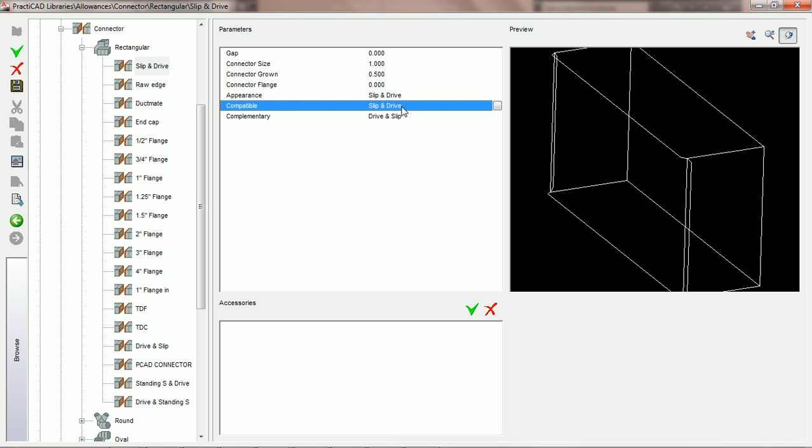You can see that we've got compatible selected as itself, which is always natural for all connections. However, we want to point out something in this particular case. When we say compatible with slip and drive, we're talking about if we attach the width of one fitting to the width of another fitting, then we should use the default compatible connector. In this particular case, it means slip and drive should be slip and drive on both sides of the connector.

However, if we were to take the second fitting we place in a drawing and rotate it at 90 degrees, now we'd actually be attaching the depth of that fitting to the width of the first fitting. In that particular case, we need the connectors on the second fitting to change. And that change is defined by whatever connector you've chosen in your complementary selection set.

So what we're going to do here is say for slip and drive, we would like to make a complementary connector of drive and slip. Now currently in this tutorial it's already set to do so, but to show you how you would get it set to what you'd like, you'd come over here to the dialog box, you'd click on it, and then you'd answer the two questions in the complementary field. The first one is what connector should be complementary with slip and drive? In this particular case, we've said drive and slip.

That means that if we were to take two pieces of duct and we were to rotate the second piece of duct at 90 degrees, that instead of using the compatible connector, it should switch and use the complementary connector. And this is going to be much more clear when we demonstrate this on the drawing shortly. So we're going to say that for slip and drive, the complementary connector will be drive and slip.

Now one thing I want to point out, each connector can only be complementary with one other connector. You cannot have slip and drive complementary with two different connector types, only one. Therefore, if you set a complementary connection for one connector, in this particular case, slip and drive is complementary with drive and slip, PractiCAD would automatically change and update the complementary connector for drive and slip to slip and drive. It just does the reverse. You don't have to change them both.

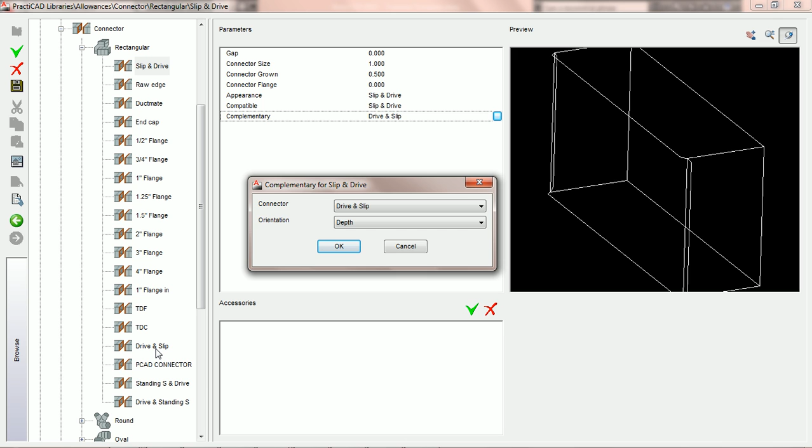You'll notice if we press OK, since we've set slip and drive to be complementary with drive and slip, if you click on drive and slip, you'll see complementary is now slip and drive. It does it automatically. You only have to change it once. So we're going to go back into slip and drive. We're going to go to complementary, go to our dialog box, and we're going to look at the next choice.

The next choice is about orientation. Two choices here, width and depth. Essentially what we're doing is we're stating that for a particular connection, we want the drive on a specific side. For example, we say that if the connector is slip and drive, the orientation of the drive should be on the depth. If we had changed it to width, it would put the drive on the width.

But for those that want to make it so that the depth of the fitting, which is usually the parameter we're looking at in front view, is always going to carry the drive, we set it here, and now we press OK. You can see if we come over to drive and slip, and we go into complementary, drive and slip's complementary with slip and drive. But for the drive and slip connection, we're stating that the orientation of the drive should always be on the width of the fitting.

And we're going to show you what classifies as width and depth of the fittings very shortly. But these parameters happen to be the most commonly used as well. So if you're trying to set your PractiCAD for slips and drives and slips, standing S's and standing drives, these are the most common choices here. Generally, the philosophy is always put the drive on the depth or always put the drive on the short side. And there's a separate tutorial on that under the advanced specification section.

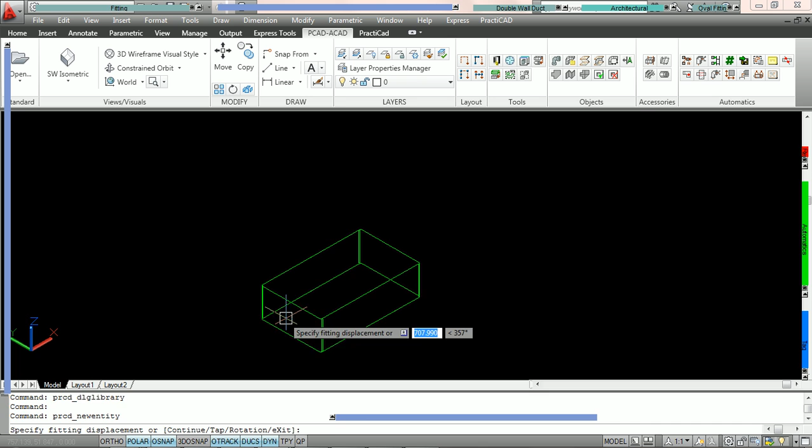We're going to go into the fitting bin and we're going to grab a rectangular piece of duct. And you can see here that we've got it set for slip and drive and slip and drive. Now what we're going to do is place this fitting on the drawing. And we're going to double click on it and open up the AutoCAD property box. You can see the connectors here.

Now what we're going to do is let go of this fitting. We're going to grab a rectangular elbow. Now we're going to hit C spacebar for continue. And let's go into the item box. Now take a look here. Currently, I haven't placed the rectangular elbow on the drawing yet. It's still waiting for me to attach it.

But in order to attach the rectangular elbow to the rectangular duct on your drawing, it currently has the connector in slip and drive. That is slip and drive's compatible connector. Slip and drive was set to be compatible with itself. That will always be the choice when we're taking the width of one fitting and attaching it to the width of another fitting. And we always read in PractiCAD the width of elbows as the cheek parameter.

So this parameter here is the width of the elbow. The throat parameter is the depth. So since we're attaching the width of the elbow to the width of the rectangular duct, and they're attached right here, we're using the compatible parameters.

However, if we switch this elbow and rotate it at 90 degrees, we're now taking the throat or the depth of the elbow and we're attaching it to the width of the rectangular duct. In this particular case, PractiCAD does not use the compatible connector for the elbow. It uses the complementary connector for the elbow. And you can see here that it says drive and slip.

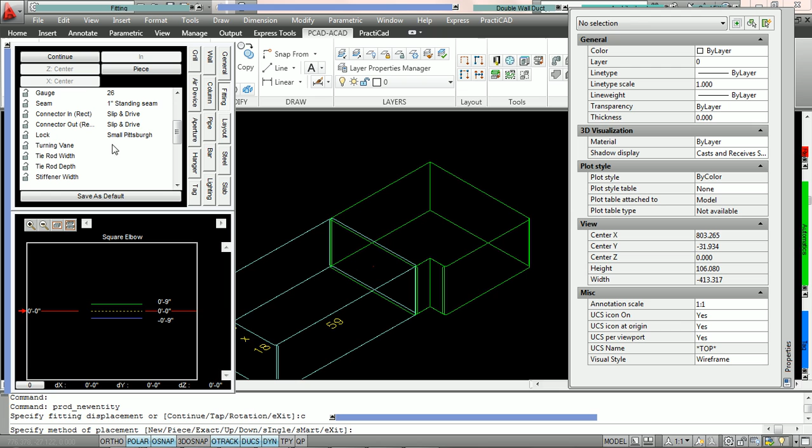So what we've got is the ability to just rotate our fittings using complementary connectors. And if we're going width to width, it uses compatible. If we're going width of one fitting to the depth of another fitting, it uses complementary.

So here you can see we're going to attach an elbow. Then we're going to take this elbow, we're going to rotate it, and then we're going to add one more piece of duct. And we're going to hit escape, and we're just going to look at the parameters of all these different fittings. Here we've got an elbow. You can see that PractiCAD, based on the parameters we've chosen, is choosing drive and slip. The drive is on the width, the slip is on the depth.

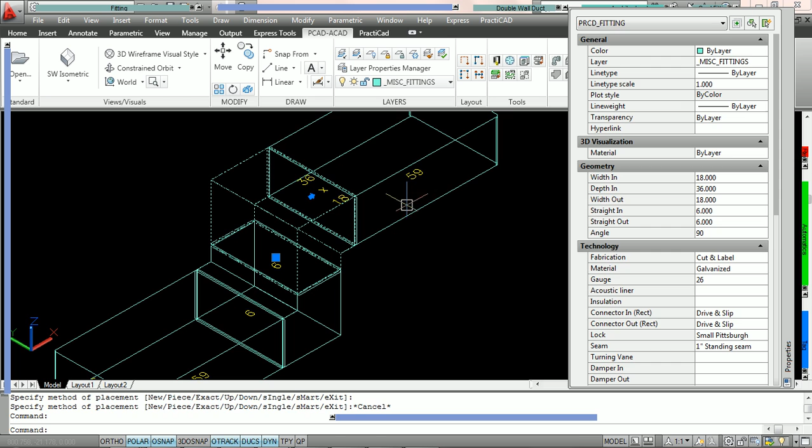The cheek is the width of this fitting because it's a rectangular elbow. And the cheek is carrying the drive. You can see right here, the drive's on the width of this fitting. It's right here where it should be because we said orientation, width. And if you go to click on the rectangular duct, you can see that it's slip and drive. It's got the drive on the depth of the fitting.

And that makes sense because we're attaching the width on one, where the drive is always carried on the width of the drive and slip. But for the slip and drive, we stated that the drive is always carried on the depth. So this way they make perfect complementary connectors. Setting these correctly will make it easy to just rotate your duct and attach it in PractiCAD, and make sure when you download the PractiCam, you get the drives and slips on the proper side.